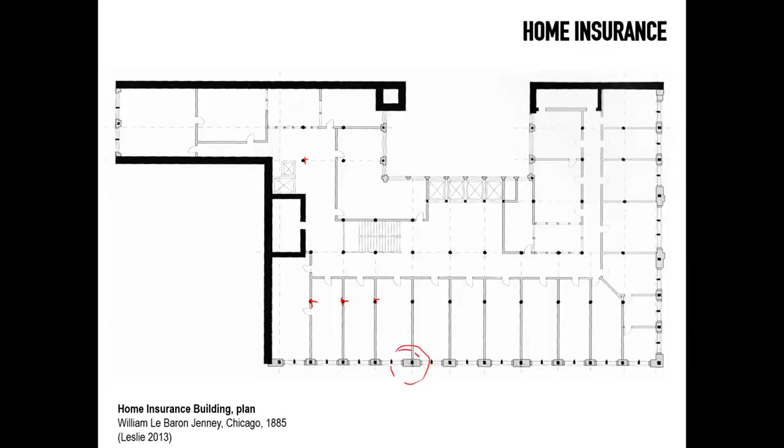However, looking more closely at this building, the Home Insurance Building, you will recognize that in reality, yes, there is a framing system that is clearly recognized from this plan inside. You can see some of the characteristics of what we would recognize as tall buildings still today. So we see lifts here, all arranged in a bank, and we see a series of columns that are obviously receiving beams and framing the interior of the building as a skeleton. However, if you look closely around the perimeter of the building, you will find how the external columns are in effect buried inside a masonry pier.

So more precisely, and this wonderful reconstruction here by Tom Leslie, a professor at Iowa State in the United States, shows how there's an almost composite approach where you have a cast iron column that is embedded in a pier of concrete, and then this cast iron column supports some steel girders, which in turn support a floor system of terracotta tiles. So this is not quite the skeleton frame as we know it today, and you can see in this historical picture here on the right how clearly the cast iron column is embedded inside the concrete. Now, you probably would argue, yes, but the concrete is there just to fireproof the column.

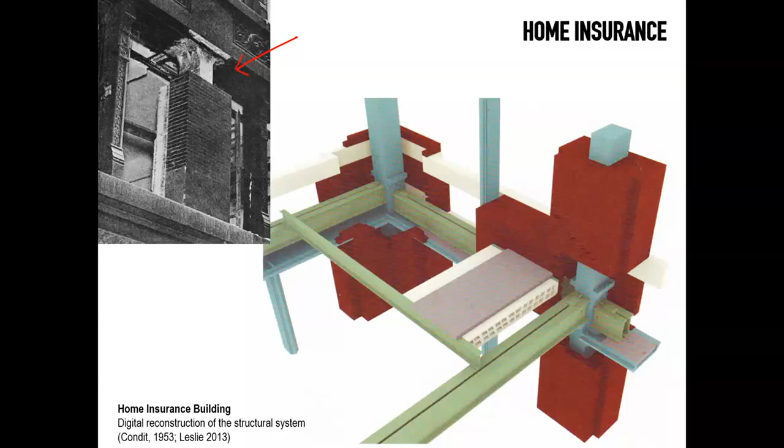Well, not really, because actually the weight of the concrete surrounding is giving also more strength to the external frame of the building. Tall buildings are like vertical cantilevers. They need to be stiff and rigid as well. And cast iron, as we know, is not a material that is very good in bending, and it's subject to failures if exposed to significant loads, to buckling, for example. So the pier around the cast iron columns is actually somehow reinforcing also the column, preventing it from buckling, and also adding additional weight to resist the wind.

Nonetheless, this is a first step in a sequence of buildings of which certainly Le Baron Jenney was at the forefront. And in fact, we will probably recognize some of the principles of skeleton frame more in buildings that are less known than the actual Home Insurance Building, or less celebrated, I should say, in particular in department stores. So you can see this building here, which has been demolished in Chicago, which is actually antecedent to the Home Insurance Building, where you can recognize more clearly this sort of skeleton approach.

Probably the commercial pressures that need to be very pragmatic with these buildings induce the architect, or architect engineer in this case, Jenney, to reveal the structure in a more direct way than in some of the commercial buildings that have a bit more of a dress to attract tenants. And you can recognize this approach here, where suddenly we actually see the columns that are, yes, not quite embedded, protected by a wall on the outside. So they are engaged with an external shell of masonry, which is helping the building to be stabilized.

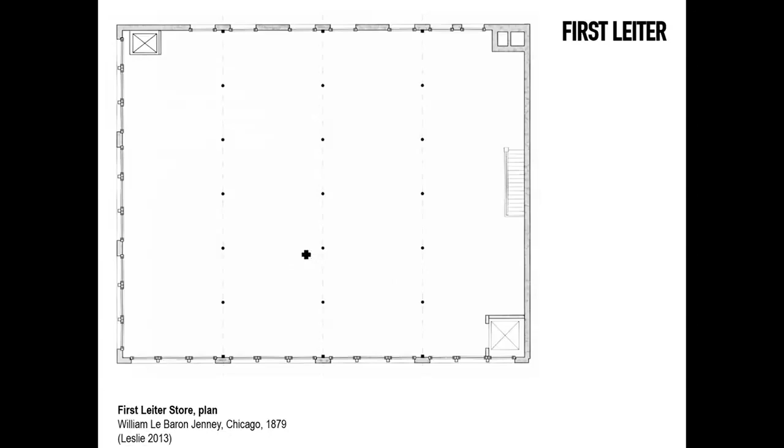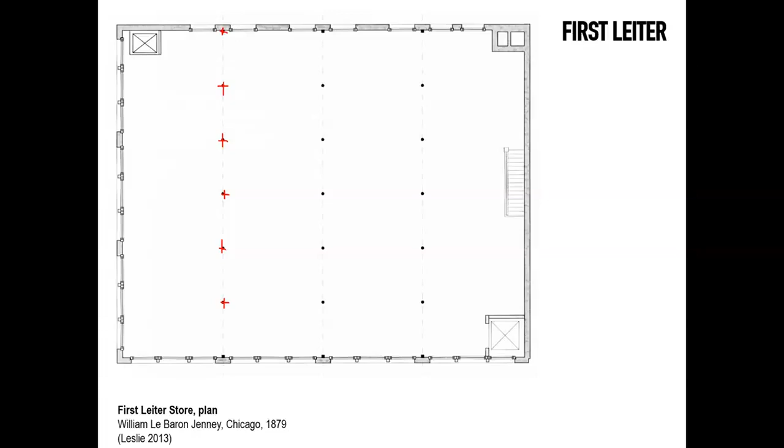And then a series of cast iron columns again that are obviously providing support for girders, and then from girders there will be secondary beams. This is a department store. It's not a tall building. It's not a skyscraper. It's a building that is wider than it is taller. But nonetheless, the skeleton frame is starting to take shape, combined with this external shell of masonry that gives more weight and more lateral stability to the building overall.

Now, the reason why really we cannot talk about skeleton systems in full in these first examples is because very often the columns are cast iron columns. Cast iron is a material that is good in compression, but not so good in tension as you would think. Not all iron is good like steel today, that is just as good in compression as it is in tension. Cast iron is brittle. It tends to fail quite unpredictably. A bit like glass in a certain sense. It tends to snap. It cannot be welded. It cannot be modified on site. It cannot be perforated, for the properties of the material itself.

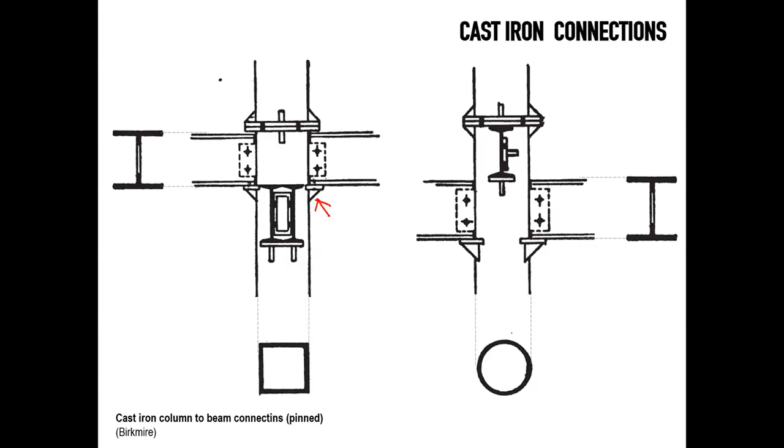And so very often we see cast iron columns that support beams, but they do so by having very simple pin connections, very often supported by a little shoe, a little leg that is part of the cast iron column itself. So in this sense, they are not the frames that we would expect normally today. You can see in these other details here how two cast iron columns come together by splicing each other by using bolts. They're not welded. The connections are not necessarily continuous. They will be prone to imprecisions on site.

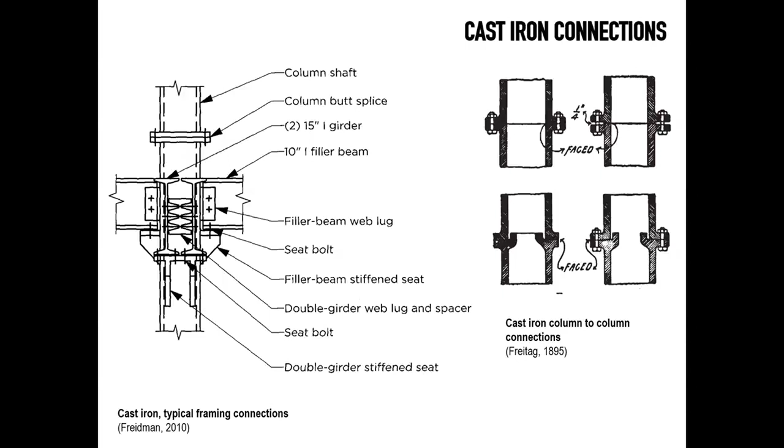There will be some elements of tolerance that will make these pin connections quite loose, and therefore they don't have the rigidity and the continuity of structure that we would normally expect, particularly in a high building where a certain amount of stiffness is required to prevent the building from moving too much, or if not, to catastrophically come down as a result of an excess of overturning on the structure.

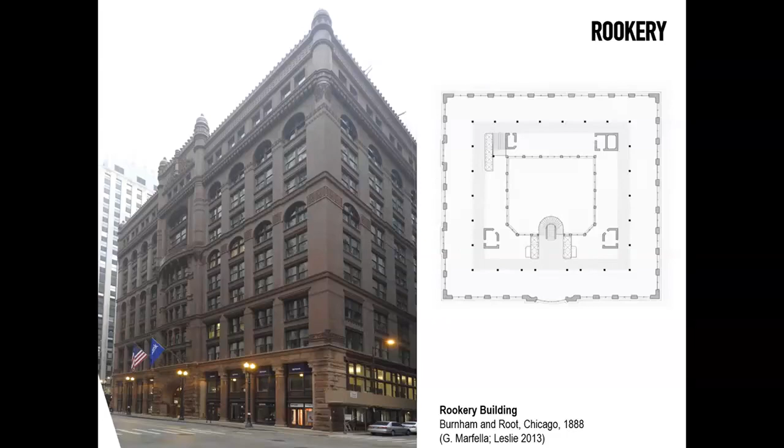And we can see again this tendency to combine an external masonry shell or cage with an internal arrangement of freestanding columns of iron, often combining iron and steel, but most often using cast iron as the primary element of the structure. And we can see this repeated in some of the best examples of the period, like the Rookery Building, one of the most prestigious commercial buildings in Chicago during the 1880s. And again, you can recognize here a very deliberate approach of relying on masonry to somehow stiffen the building and give it some stability and weight on the outside.

This is what is probably referred to as a neo-Romanesque building, and you can recognize here very clearly the piers terminating with this sort of revival of classic forms that are combined with some cast iron spandrel beams that connect the piers together also horizontally. But ultimately, there are some elements of change that are happening, that are visible in particular in the Rookery at

the back of the building, where at the base of the structure suddenly the masonry just sort of disappears, and it transitions into this cast iron shop front in a laneway at the back of the building. Some of the lightness of the internal structure of the building is also visible from a light court that is inside the building. A light court that was also covered with glass, and that was also refurbished in the early

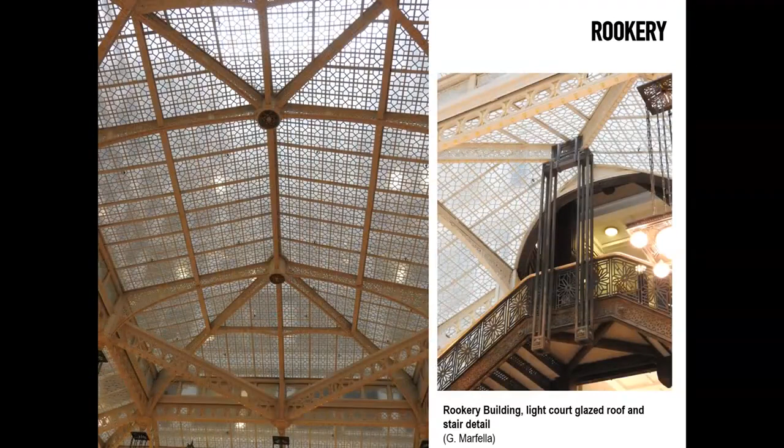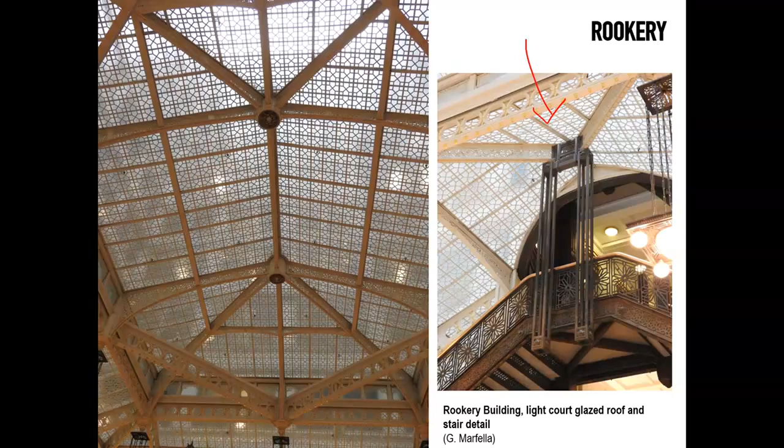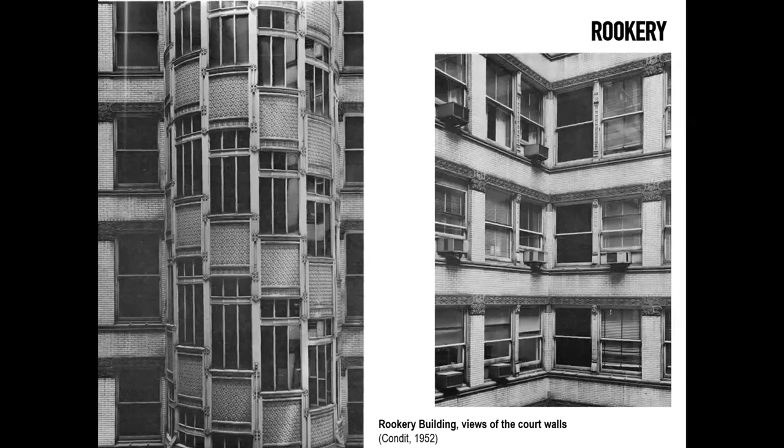And this tendency towards lightness of envelopes becomes much more evident, particularly inside, in the walls of a light court, that somehow anticipates what you would recognize as a curtain wall, or a lightweight system that is covering the structure, but not necessarily working also as the structure like you would normally expect in a masonry building.

So these are some examples of a series of buildings that happened in Chicago, particularly between the early 1880s until the end of the same decade, and as you can see, there's still the dominance of masonry as the principal material that helps multi-story buildings to resist lateral displacement or the force of the wind.

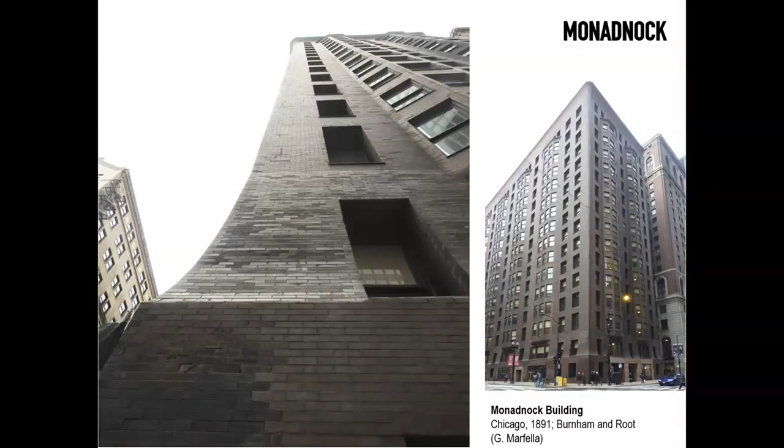But something happens during the 1890s, or at the transition between the 1880s and the 1890s, where we start to see buildings that take some of these ideas of the steel or iron frames inside the building to another level. In other words, there is an understanding of the structural challenge of a tall building that requires some bracing elements. There's a building that is certainly very, very significant in this transition, and that is the Monadnock building, which

again uses masonry to a great extent, but it pushes almost the limit of masonry for a multi-story structure. And you can recognize this building, how it's somehow tapering from the base to the top, particularly in this very dramatic view, where the external skeleton of the building is masonry. In addition to that, there are some shear walls that are helping the structure to be stabilized.

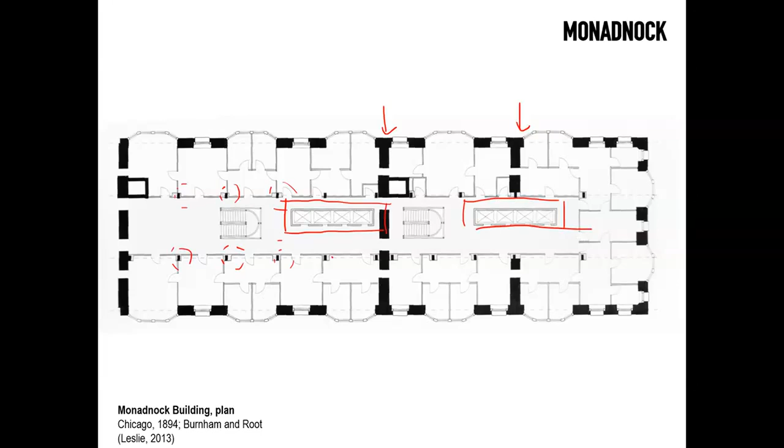But internally, again, we see reappear the lightweight columns of cast iron or steel combined together. We see the approach also of having, in this case, two lift cores here, or two lift banks side by side next to the stairs that provide circulation. But certainly there is now, again, masonry that has been used to its maximum by using a tapering on the structure outside, as well as these very noticeable shear walls inside.

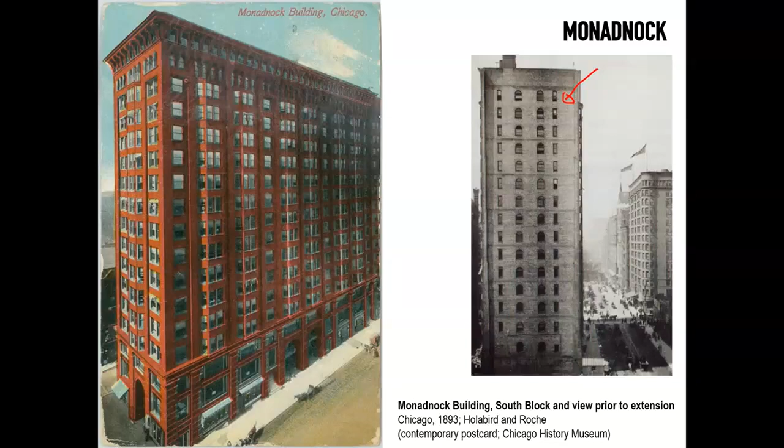So the Monadnock is probably the ultimate masonry skyscraper in a certain sense. But it is also a building that has a core or an internal soul of steel and cast iron.

So you can see again in this digital reconstruction how the masonry is somehow working again in a combined fashion with steel. But most of all, it's also making an acknowledgement here of the lateral forces that are working on this building by very noticeable shear walls and some braced frames that bridge from one side to the other.

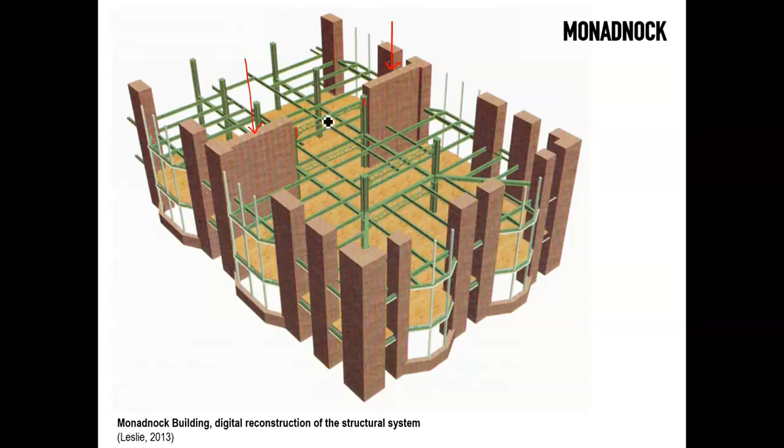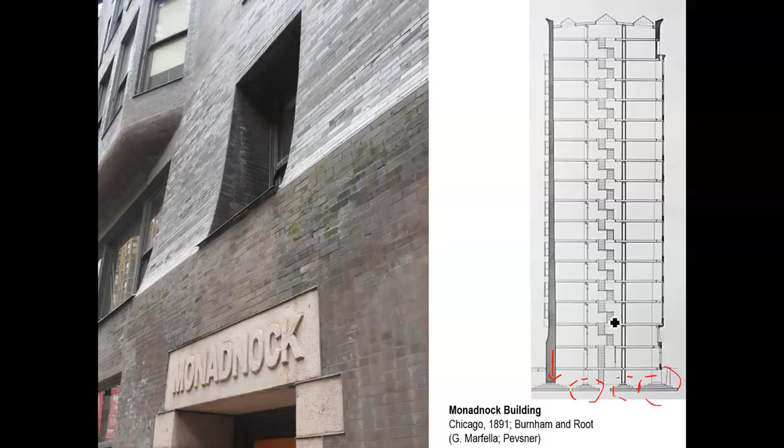And you will recognize here how the internal structure, on the other hand, is still lighter. It's iron, it's steel. It is basically a skeleton, semi-skeleton structure that is distributing its load also on the ground using this very characteristic foundation that was developed in Chicago in the same years.

A grillage foundation of steel beams or rails that are superimposed and they sort of create a pyramidal arrangement that spreads the concentrated load of the columns progressively onto a larger area and then eventually onto a concrete footing. Now, this was very important for a city like Chicago, which, unlike New York, that sits on a fairly shallow bedrock, relatively shallow.

Chicago had a bedrock that was much deeper than that. So very often these buildings had to rely on a soil that was clay, that didn't have the same bearing capacity that you would find in rock, and therefore there was an additional need to spread out these buildings using this technique of using rails of steel superimposed onto one another.

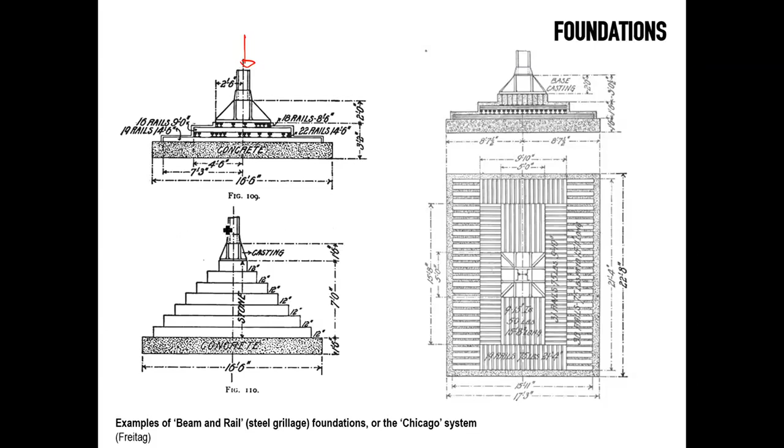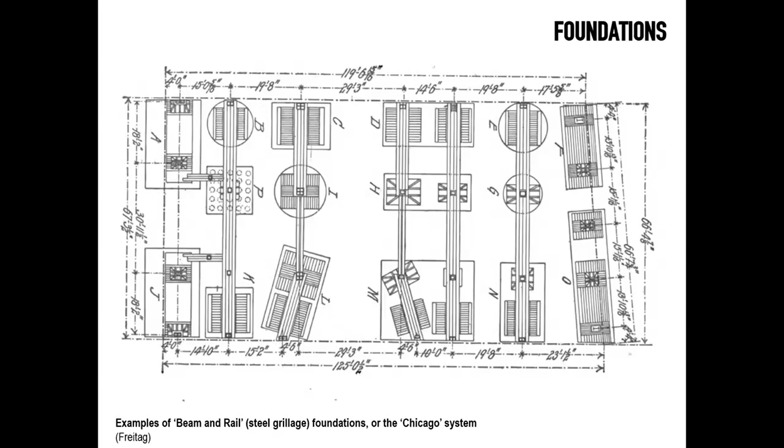And this would be the arrangement of buildings that were relying on these steel piers, sort of coming down to a series of steel beams or girders laid out horizontally in layers and crisscrossing each layer with the next one below, so that all the loads eventually can spread out more efficiently. But there's other developments that take shape, particularly in the bracing strategies of the architects in Chicago.

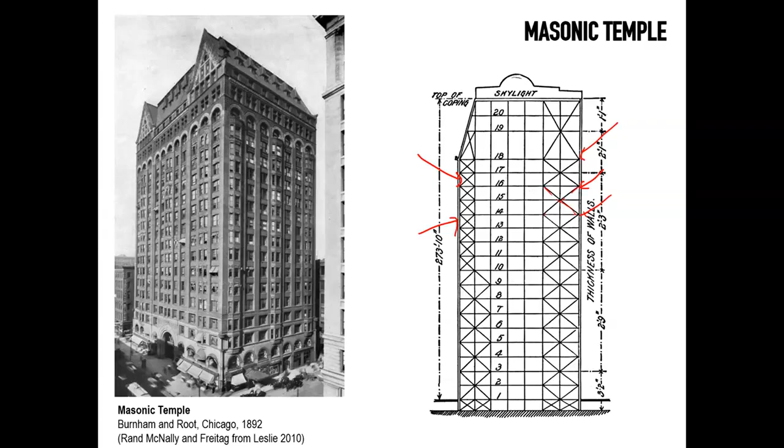And again, we see a building by Burnham and Root, the same architects of the Monadnock here, designing the Masonic Temple, a building that was demolished in the 1930s, where suddenly we still see, yes, the masonry cage on the outside, but in the internal steel framing, that it's using braced frames. So you see these crisscross patterns here in between the columns along one of the edges, and even almost on a floor basis, and then even more so on the other side of the building when you have crossed brace frames for two stories at the same time.

And you can see a similar approach also in this other building, more or less in the same years. This one designed instead by Holabird and Roche, other architects still very successful and at the forefront of these developments in Chicago, where, yes, again, you see a shell, an external skin of bricks here, in this case, not so much neo-Romanesque, but almost neoclassical, particularly at the top. A fairly austere brick piers and horizontal structures of brick on the outside, that it's probably, in a certain sense, even anticipating modernism as a language.

But ultimately, it is a building that is still transitioning, and it's doing so by using these very interesting portal frames. So you see again here in the plan quite clearly you have a steel frame or a combination of steel and cast iron, and these portal frames that are located in this position. The columns being embedded inside masonry again. You see some pure masonry mullion columns in between, and the building is stiffened, being a rectangular plan here, with a wall shared here with another property, and these wonderful bay windows here on the corners that are semi-circular, to give more light to the deeper sides of the floor plate.

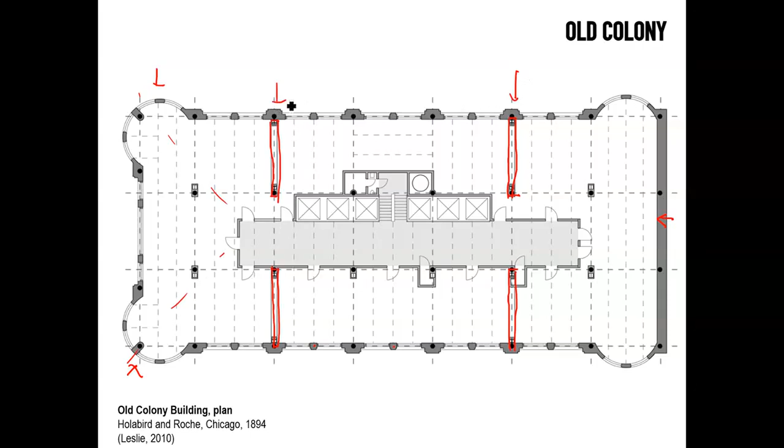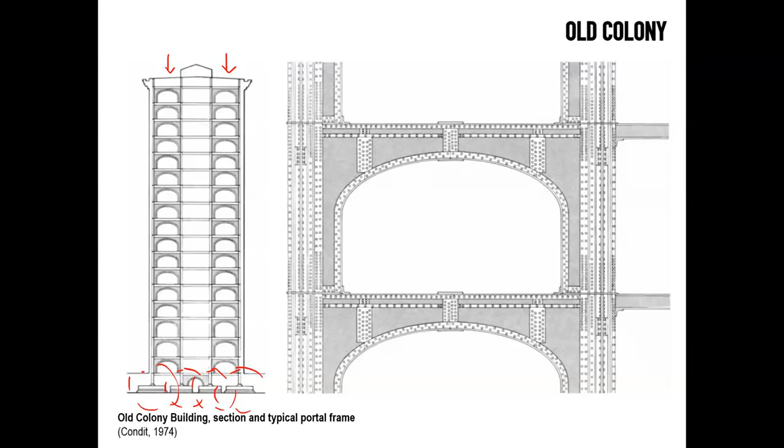But you see in this location that I've highlighted, there are some braced frames. There are portal frames, very large portal frames with this segmented arch profile that are cutting through the floor plate, and they are located on both sides of a central corridor containing the lifts and circulation of the building. These are steel plates that are riveted together, so very laborious technique that is putting together steel profiles to provide stability to the structure laterally. And you can see how the foot of the building is still employing the typical Chicago steel rail foundations.

But there's another development, again, Holabird and Roche, same architect of the building we just saw, the Old Colony, where they sort of recover some of the elements of the Monadnock. So we see now to reappear, yes, these shear walls, but instead of using the large steel and riveted approach almost of these internal walls, they use masonry in this building, the Tacoma. And they do so by freeing up again the perimeter of the building to use these bay windows as a continuous frontage, so providing more light inside.

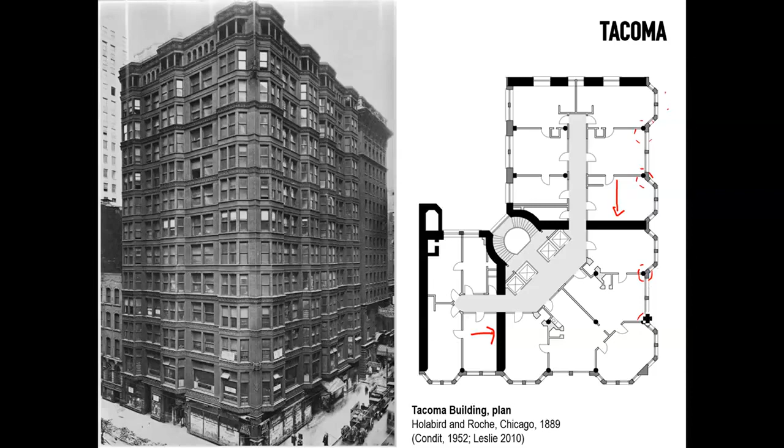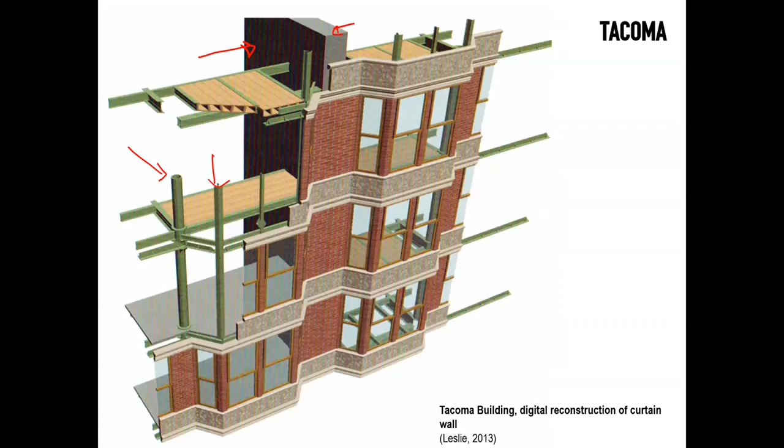But developments also happen not necessarily in this multi-story building, but very often in buildings that are not necessarily as tall. And particularly, again, going back to the department store, we see how Le Baron Jenney continues to take this concept further, to the point that we start to see here in 1890, 1891, the first pure steel frames all around, where you have riveted profiles of steel combining columns and beams to provide very

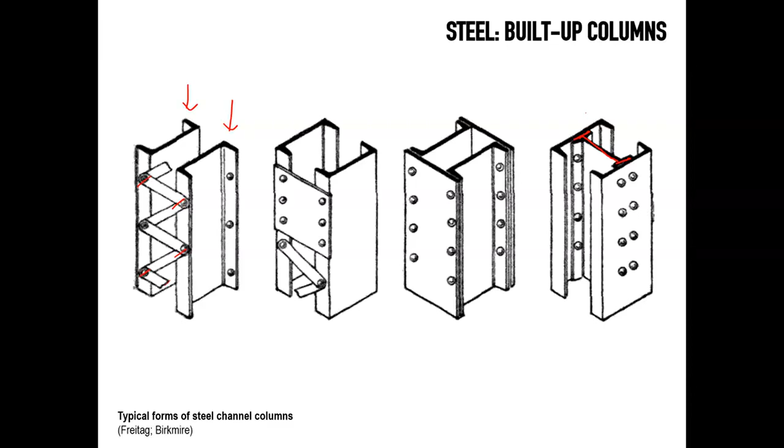So you can see here some examples of columns that were available in those days, where you have, for example, two channels side by side connected by a series of plates riveted to the flanges of the channels, or a combination of those with some plates that connect channels together, or two channels back to back here connected by an external plate on the outside, or a simple I-beam here, an I profile, combined with two channels riveted through the flanges on both sides.

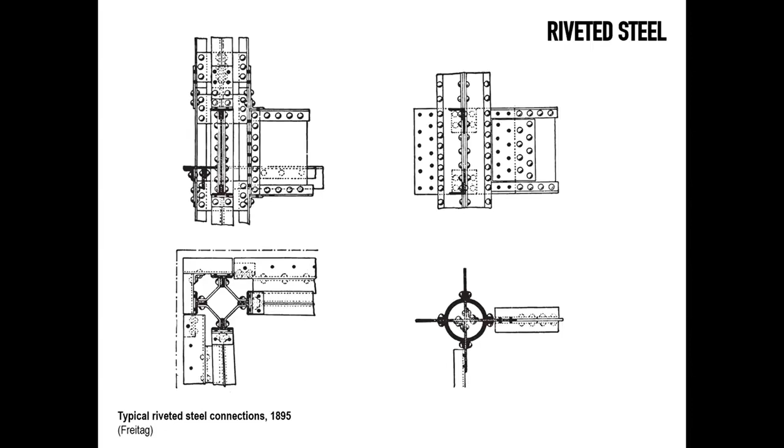So this configuration now creates opportunities to connect these columns to beams and create entire skeletons of steel that are now eliminating cast iron, the unreliable, brittle, and somehow incomplete performance of cast iron. It's ruled out of the picture. Wrought iron also was used very often in these buildings, but as we know, wrought iron was a fairly laborious metal to work with and to produce. Suddenly steel displaces this material and can become a standalone material that is easy to fabricate, easy to adjust on site if needed, and also easier to design with because from a structural perspective it performs both in compression and in tension in an equal manner.

And so at this point, this is when finally in the early 1890s we start to see the first true skyscrapers, perhaps the first true standalone pure skeleton buildings, in the same way that we would recognize them today as multi-story buildings. So arguably, if there was any first skyscraper, it's probably one of the ones that I'm showing next, although it would be difficult to pinpoint just one building rather than another.

The Reliance building certainly responds, again, another building designed by Daniel Burnham, a former colleague of Root, who by this time had passed away. And this building certainly incorporates those elements of the steel frame clad by a lightweight facade all around. And it does so much more than, for example, the Home Insurance Building that is often, a bit hastily, pointed to as the first skyscraper in history.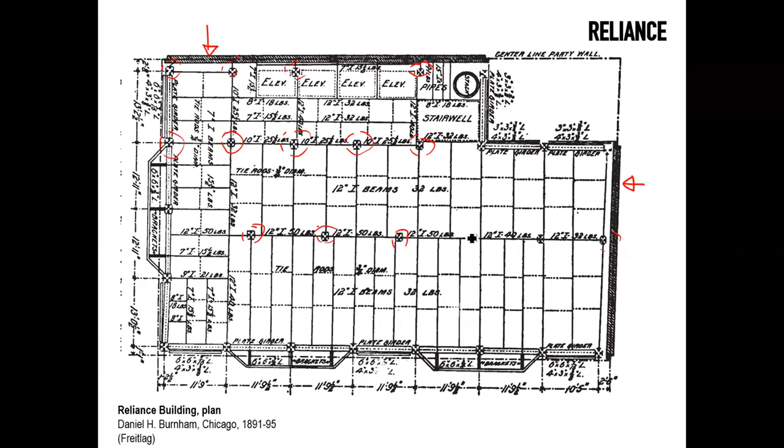In this sense, perhaps the Reliance building is not truly the standalone freestanding skyscraper yet, because this wall certainly would have also played a role in helping the building. But you can see how along these walls there are some columns that are supporting the building. A bit less on this side, but certainly you can see how the perimeter of the building has got these bay windows, and you recognize now there is a series of columns here that are just standalone, supporting girders and secondary beams throughout. And this is a picture of the building going up.

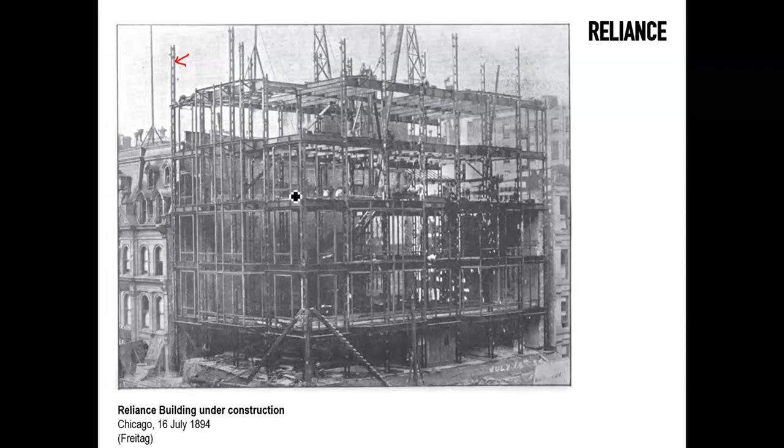You can see how the building is able to stand alone without needing any help from the side walls in masonry. You can recognize here some of the steel beam profiles being composite or different rolled profile. You can see some craning elements here, and you can recognize that this is a very common approach that we take for granted today, of a steel frame going up first, some steel mullions coming to follow to shape the facade, and then the building continuing up on its own, eventually having the steel to top the structure, whilst the concrete slabs will start to follow up below, and then eventually the building is completed.

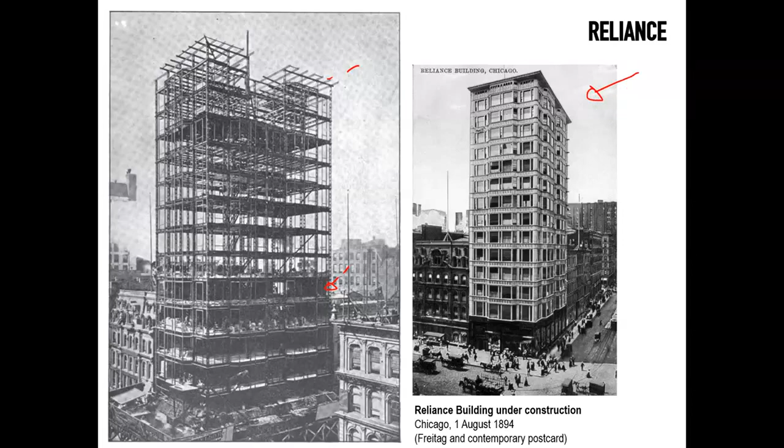So this is an interesting building in a sense that it anticipates, or it probably condenses for the first time, this ability to build a structure standalone without having to rely on heavy materials like masonry to stabilize it. But there's another interesting part of this building, and it's its facade. There's a lot of glass. This is plate glass produced industrially on a large scale, large sheets. But it is also a facade of enameled terracotta.

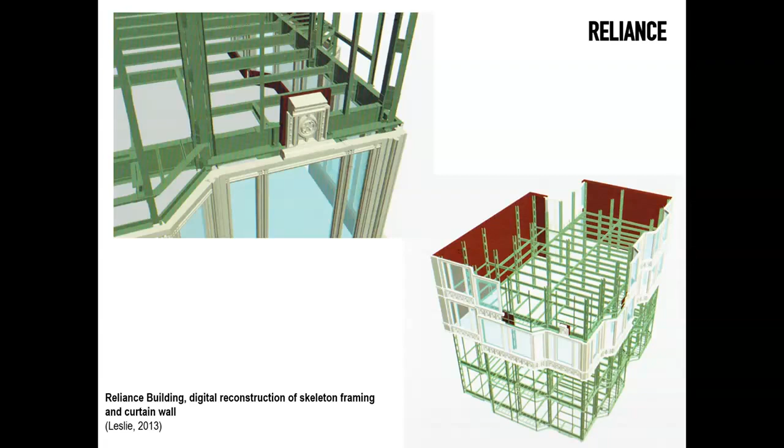So terracotta was used very often as a material to fireproof columns. We'll come back on this a bit more in detail later on. But in this case, terracotta is also used as a cladding, and it's enameled because the enamel gives it an additional ability to be durable. And you can also recognize how the structure in this case is using some of those profiles we saw before. In particular, here the Reliance building is using a very

particular configuration, which is known as the Gray column, a column that is formed by angles of steel. You can see here the angles back to back, riveted together, and these angles are organized in a cruciform fashion, so they're riveted together, and then they have these bent plates that connect 4 sets of these angles riveted together, creating a cruciform plan. And why is that? Well, there's some benefits for connection, because it becomes a very convenient shape to turn corners, for example, in a building. But also it allows it to be used in multi-story construction in a very convenient way.

So if you imagine this to be a typical column from the top of the building, at the base of the building you might want to have a column that builds up from that by adding additional steel plates that you can see in this position here. In fact, there are 3 plates that are stacked on top of one another and connected back to the angles that form the Gray column. Why is this important? This is important because it allows the column to increase its section from the top of the building to the base of the building. The loads in a multi-story building increase when you go from the top to the base of the building, and so this is a very convenient shape that allows you to build up and vary the section of the columns as you go, of course, high up vertically.

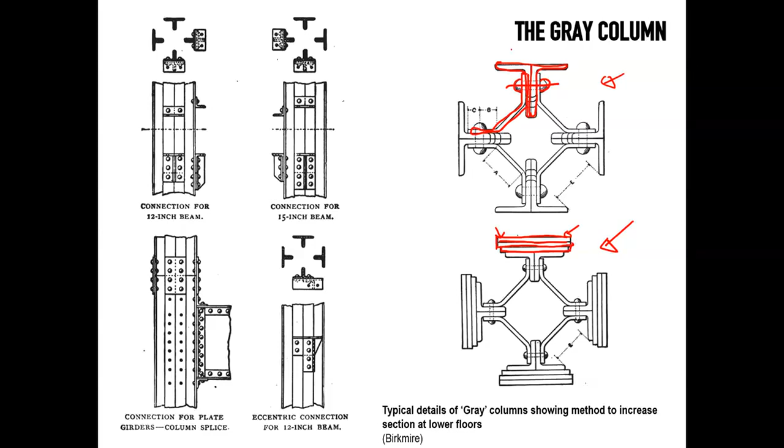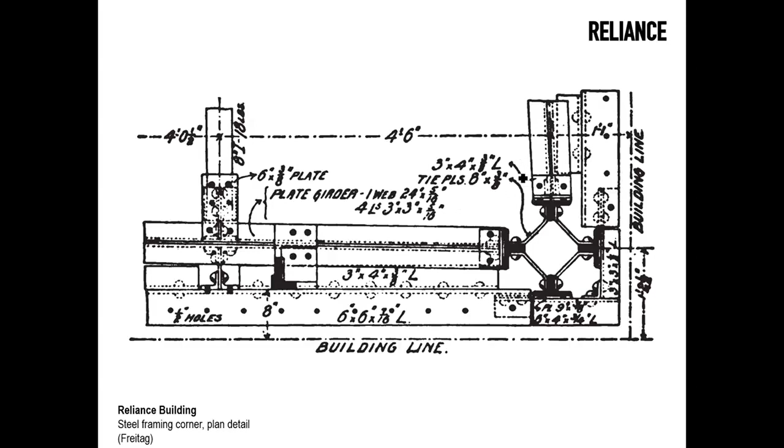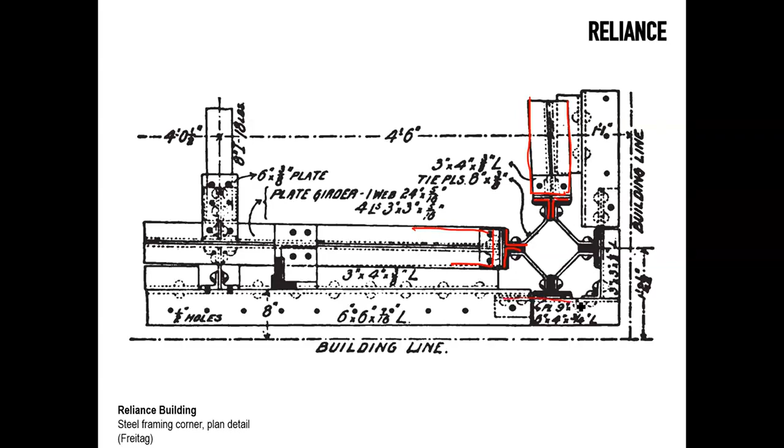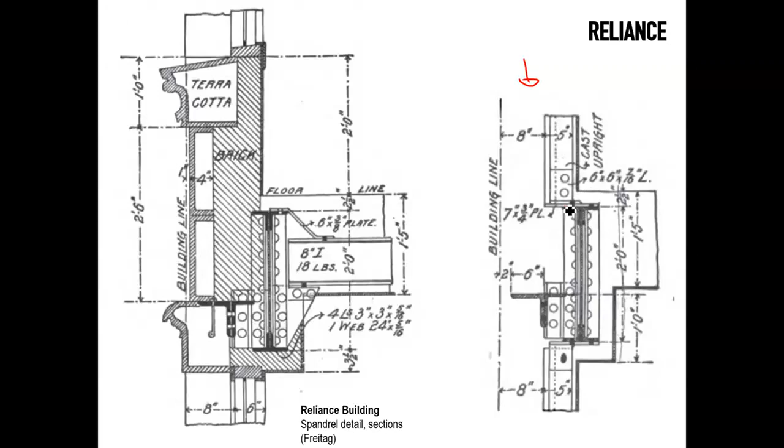These are sections of the same detail. You can see here on the right just the structure of steel, where you can recognize here a girder. You can see how the girder as well is combining angles that are riveted together, and then there's a plate that is working like a flange. You can see some rivets in the background, other plates that connect to, and you can see here there's an angle

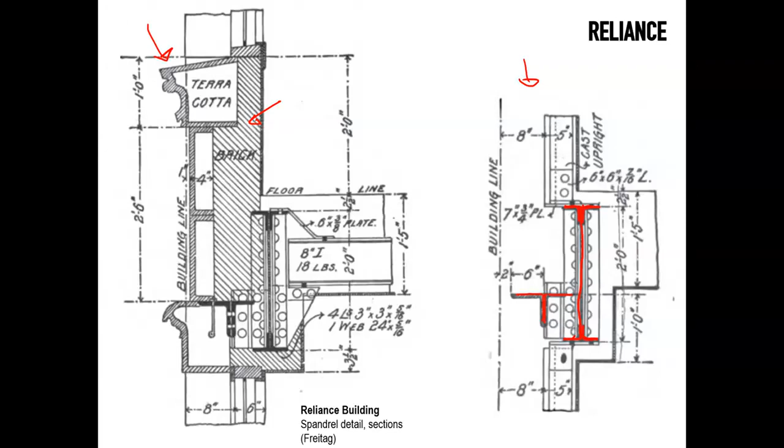profile, or two angles back to back, that become the support for a brick spandrel. A brick spandrel here just for fireproofing purposes, and then on the outside you can recognize these terracotta profiles that are the finish of the building. Enamel terracotta, as we said. And again, these are some views of the steel framing, how it's all coming together.

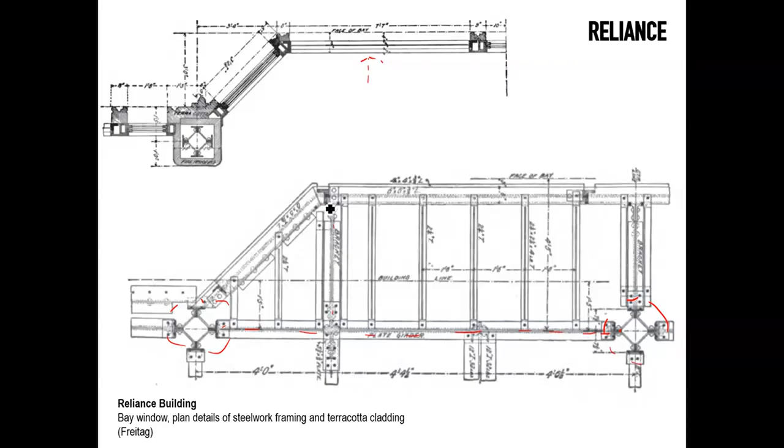You have the grey columns here, the terracotta external skin defining the bay windows, and this is a view of the steelwork below that gives you an explanation of the configuration. You have the grey columns again, and in these positions here, and then you have an edge, a beam that's sort of running in between these two, from which you have some cantilever brackets that support the bay window.

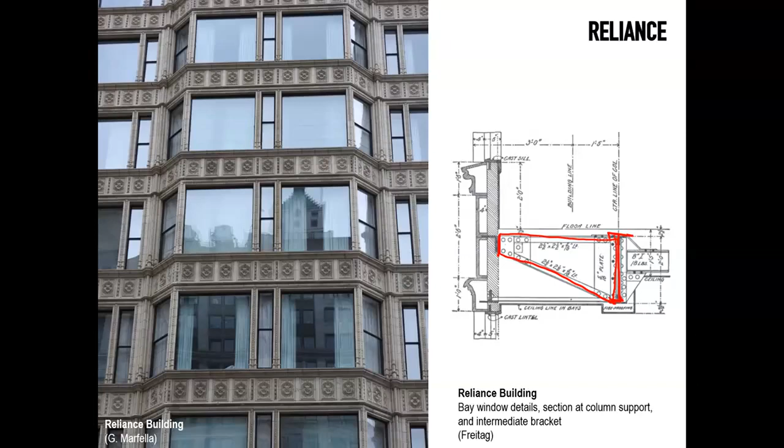And you can see here this section here, and an external view of the bay window. You have the enamel terracotta spandrels just defining each floor. There's some smaller mullions also clad in terracotta, large plate glass fixed, some operable smaller windows in between in the bay window. And again, all this is supported by these brackets of steel that are riveted back together onto these edge girders that are running past along the lines of the other spandrels.

Now, this was not just the only building in those years that was using these techniques. There's another very elegant building in Chicago known as the Marquette, more or less built in the same years, that is using a very similar approach. This is Holabird and Roche again. So there's no such thing as a first. This was all happening at the same time.

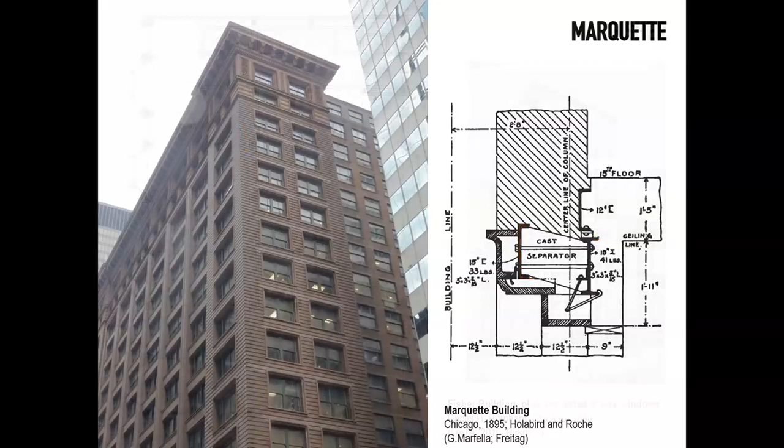But perhaps one of the buildings that really took this concept to the final stage is the Fisher building. A building that often in architectural history is a bit snubbed because of its decorative envelope, but a building that certainly demonstrated, possibly only a year later after the Reliance, after all, so more or less in the same period, not only the approach and the validity of this principle, but also it showed how fast the steel structures could be put together.

Now you recognize here on the plan the approach of a skeleton structure. You can see the columns. These are steel columns. You can see a series of primary beams that will be spanning in between, and also edge beams in between the columns that would be used to support some secondary beams, and again brackets to launch outside of the skeleton line to support bay windows, so to provide more light, a lightweight skin all around, a bank of lifts, almost like a core, I would say, an end core kind of configuration at the back of a building. Three sides, freestanding,

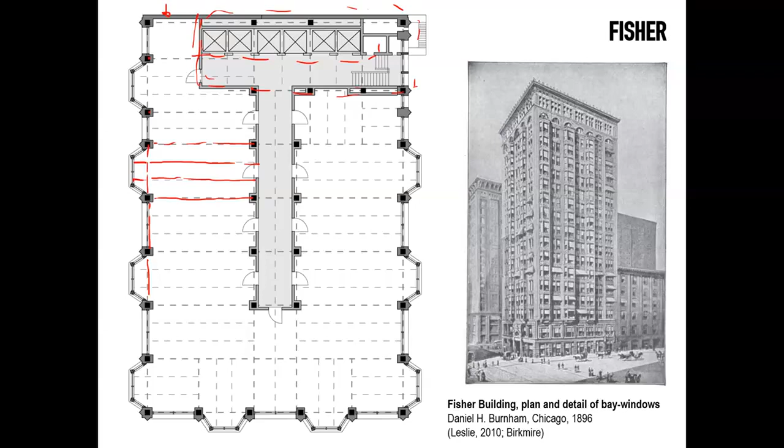a party wall with an adjoining property that will be eventually developed by the same owners of this building, with an extension of this using more or less the same architectural treatment of the Fisher building of the first stage. And this is the Fisher building today. Okay, wonderful building.

Just taking on board the same language of lightweight, almost filigree structure, where you have columns, horizontal elements, often some columns expressed, some mullions sort of introduced in between to provide a suitable break for fenestration or subdivision into rooms for offices, then bay windows, and then a cornice normally terminating with semicircular arches, so again borrowing a bit from the neo-Romanesque, and then a cornice at the top.

This is also some pictures of the building under construction. You can see how everything is steel, including on the ground, including down to the foundations, as we saw very often. And then a series of columns going up, starting to prepare the work from the floors above. You can see some derricks there, or cranes in the background there.

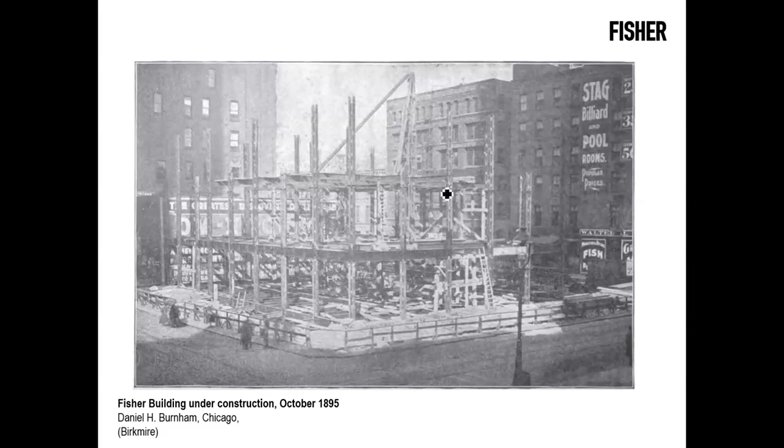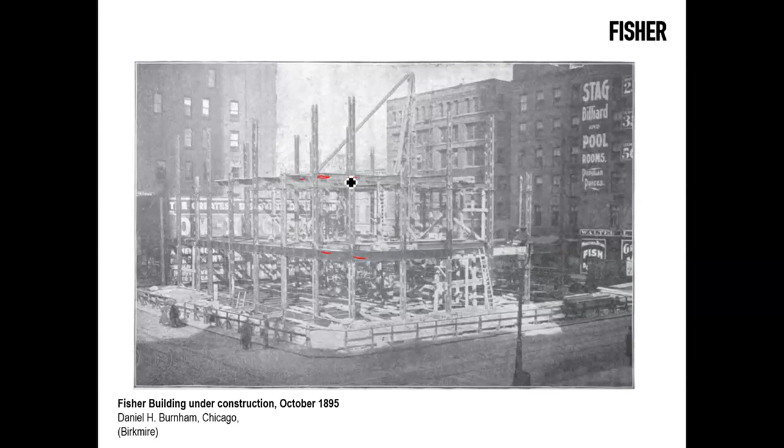And you can see how the building starts to take shape over the ground floor, with a series of horizontal beams now supported by the columns. And you see the second level here already formed, and then the third one starting to take place. And again, continuing up, you can recognize this sort of built up steel sections. You can see it is steel throughout.

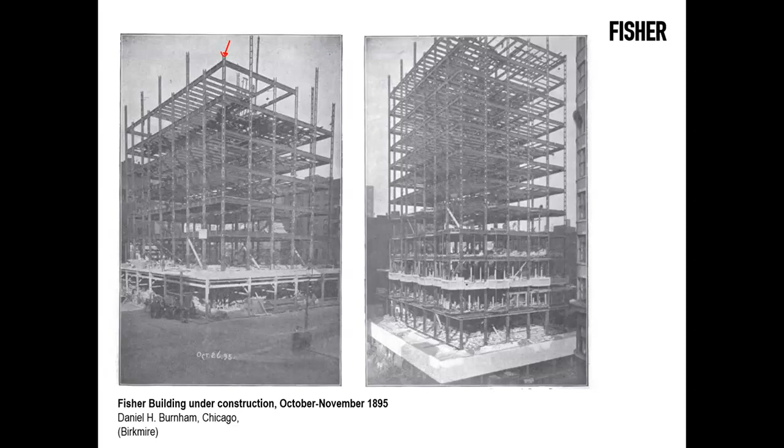The date here is November 1895. Construction started in early October of 1895. And by the end of November, the whole steel structure was completed. So two months to put together a building that today will probably take at least six months. Very fast construction, very different labor conditions in those days.

But this is a very telling picture that is telling you how the entire structure, yes, it's steel, but you can also see how, for the first time, we start to appreciate this idea of a building that is being layered vertically as you go up, like we do today. You see the skeleton is already in place. You see a platform here on the edge that is used to install a terracotta facade. And then you see that the glazing and the finishing on the building is starting to take place.

And all this can happen almost irrelevant of the work that will happen on the ground. So you can almost bypass in this way whatever might be the more laborious or the more delicate work that often happens at the ground floor. It can be finished later. Again, this is what we still do today whenever we can. And this is a final view of the building here.

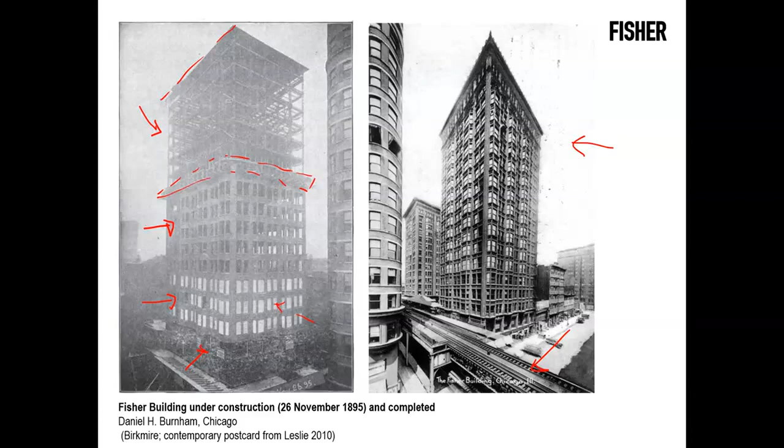You can see in this very telling contemporary postcard, where you have the building standing up, completely freestanding, also in front of the famous elevated railways of Chicago. And when you look closely at this building, you recognize this decorative approach. So it is a building that is often, the Chicago School is often pointed as the beginning of modernism, but in reality, the Chicago architects of those years were actually quite keen to ornate their buildings and use decorations. In this case, using terracotta.

But it was also produced in an industrial way, but not necessarily to the extent that there would be off-the-shelf products. Very often these architects were the ones who would feed decorative patterns specific for their projects, but then they would be able to use them at large scale. So the large scales of the project often gave some buy-in to these companies that produce terracotta for mass production, but also allow architects to somehow participate in the mass production process.